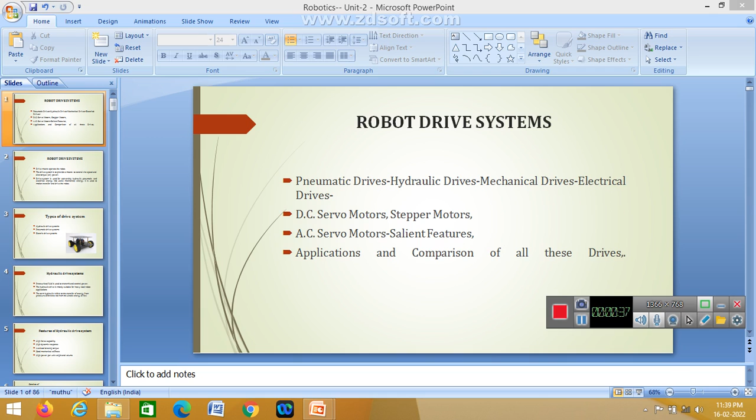Today we can see the topic of robot drive system. Okay, so the robot drive system. The following topics are to be covered, which is basically the types of drive system for the robot: hydraulic, pneumatic, mechanical, and electrical drives, and also electrical drives. The DC servo motor, stepper motor, AC servo motor, their salient features, then applications and comparisons of all these drives. Okay, so these are the topics to be covered for the robot drive system by using the robot applications.

Next one, robot drive system, its introduction and definition. Drive means operate the robot. Drive means which is used to operate the robot by using some elements or machines, so we can carry out the work. Okay, so that is the work of drive system. It is used to provide a means to control the speed and torque, also used to drive the system. Okay, so that is the second point.

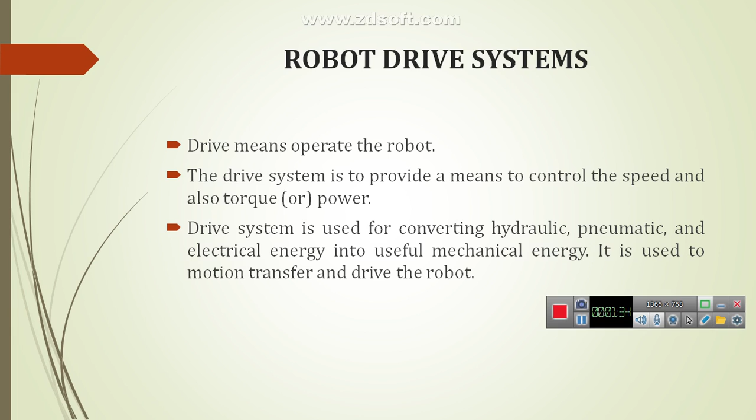The third one is the drive system is used for converting the hydraulic, pneumatic, and electrical energy into useful mechanical energy. Okay, so it is converted into a useful form of mechanical energy. So it is used for motion transfer and to drive the robot. Okay, so this is the drive system; we can carry out the work from the robot. So the types of drive system, basically three: hydraulic drive system, pneumatic drive system, electrical drive system.

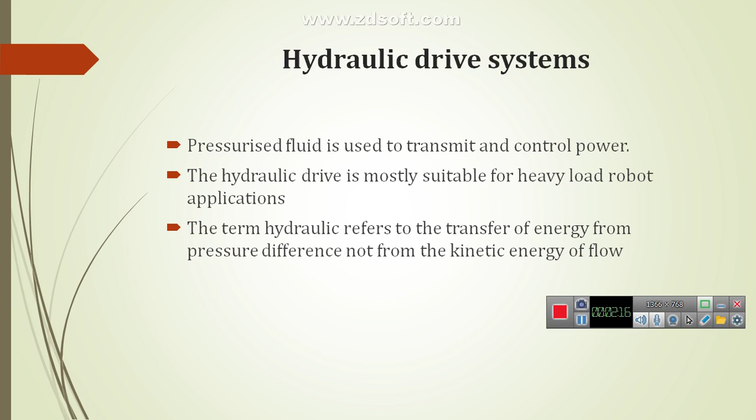So the hydraulic drive system uses pressurized fluid to transmit and control the power. Okay, so we can use the pressurized fluid to control the power of the robot. Then hydraulic drive is suitable for heavy load robot applications. Only for heavy load robot applications we can use the hydraulic drive system. The third one, hydraulic refers to the transfer of energy from the pressure difference, not from the kinetic energy of flow. Okay, so this is the hydraulic drive system. For these concepts I will show the diagram.

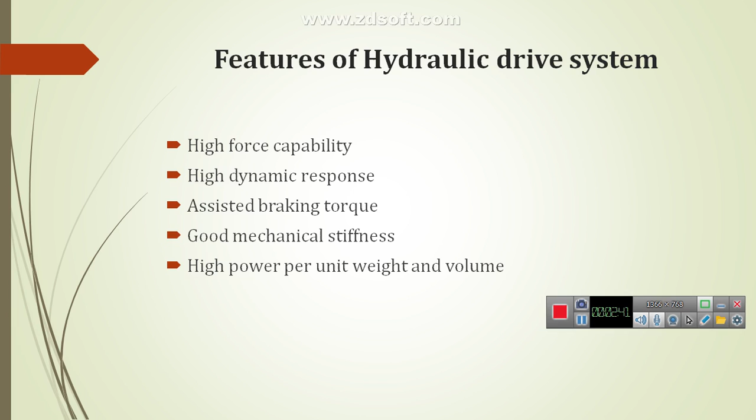The features of hydraulic drive systems: high force capability, high dynamic response, then assisted braking torque, then good mechanical stiffness, then high power per unit weight and volume. Okay, so these are the features of hydraulic drive systems. So the hydraulic drive consists of the following three main components. First one is actuator, control valve, and power supply. Okay, so these are the three main parts of the hydraulic system.

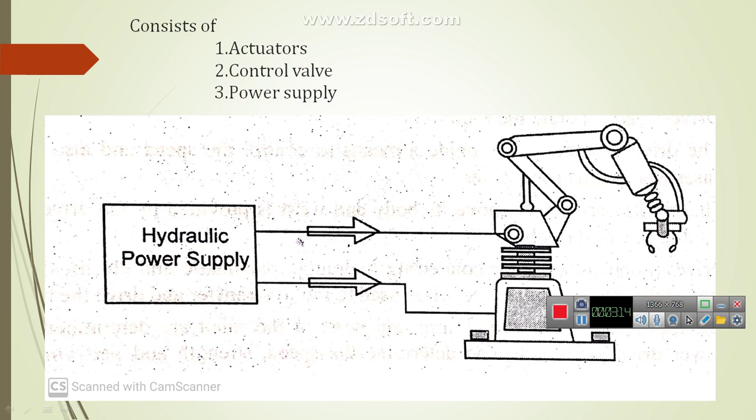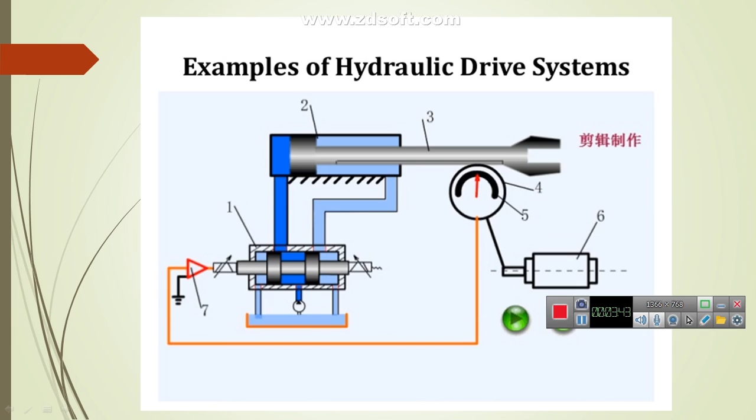So hydraulic power supplies carry the power supply to the actuator, control valves control the process, and finally the work is carried out by the end effector. Okay, so that is the work done by the robot using hydraulic drive. Then the diagrams here show the robotic actuators, which are connected to some solenoid valves, and also connected to some valves arranged by the hydraulic drive system. Okay, so that is easy to operate by using the hydraulic drive system.

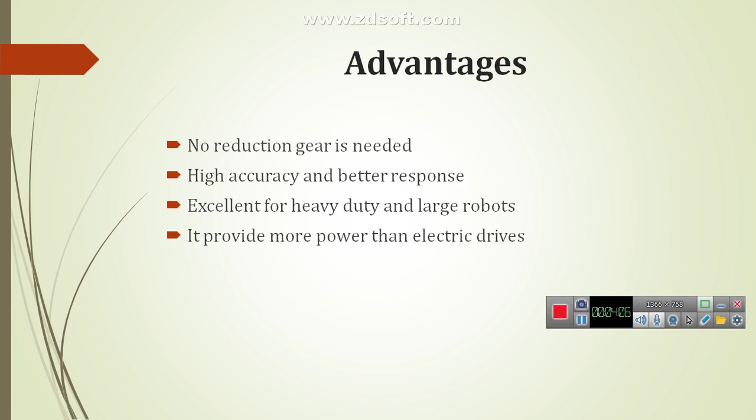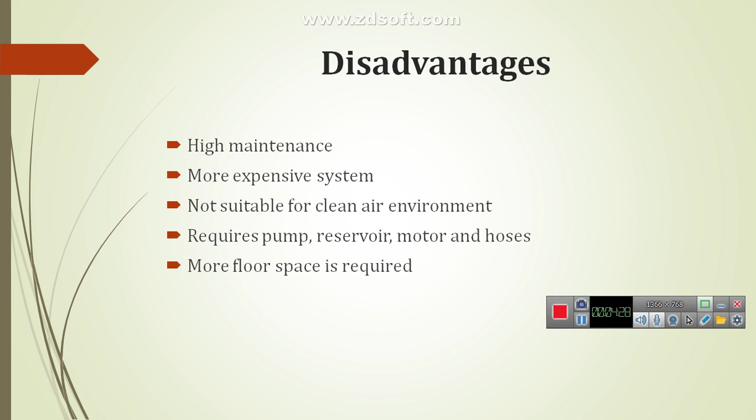Then this is the advantages of hydraulic system. No reduction gear is needed, high accuracy and better response, then excellent for heavy duty and large robots. It provides more power than electrical drives. Then disadvantages: high maintenance, more expensive system, not suitable for clean air environment, requires pumps, reservoir, motor and hoses. Then more floor space is required. So these are the disadvantages of using the hydraulic drive system.

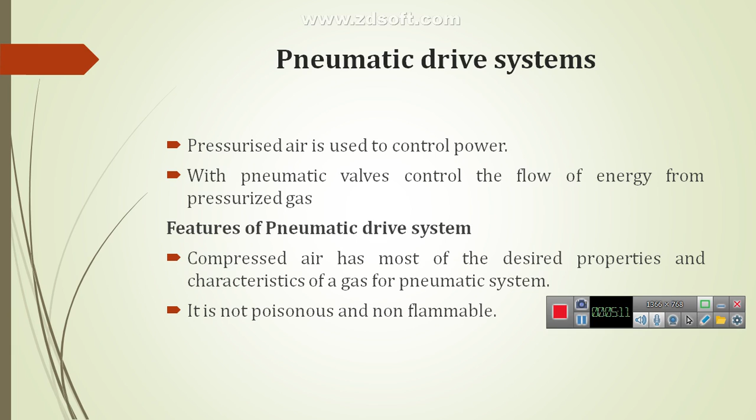Then second one is pneumatic drive system. Okay, so here pressurized air is used to control the power. In the previous one we used pressurized fluid. Here pressurized air is used to control the power. So that is the difference between pneumatic and hydraulic drive system. Then the pneumatic valve controls the flow of energy from pressurized gas. So the features of pneumatic drives: air has most of the desired properties and characteristics of gas for a pneumatic system. It is not poisonous and non-flammable, right?

Then it consists of the following three parts, connected by the power supply at the starting of the pneumatic system. The valves are connected to the actuator. Control valves control the arms and wrists. Okay, so finally they carry the work to the wrist.

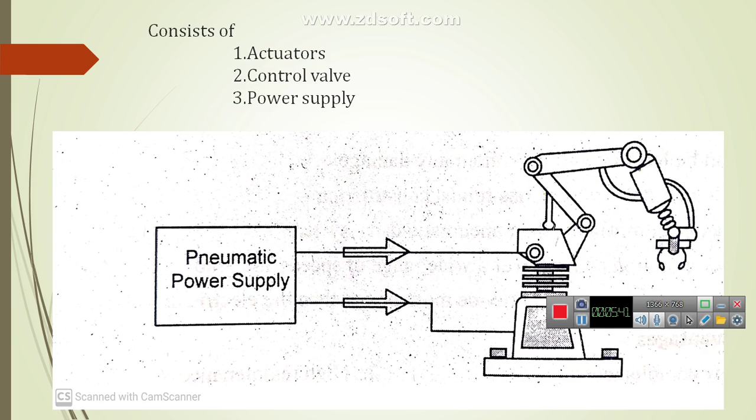Okay, next the components of pneumatic drive systems. Intake filter and compressor, cooler, separator, receiver, and finally the actuators to actuate the component. Intake filters initially remove the sediment parts. Compressors compress the air. Coolers are used to reduce the heat of the air, and the separator separates the air depending upon the work. And the receiver is a small storage device which is used to store the air from the reservoir.

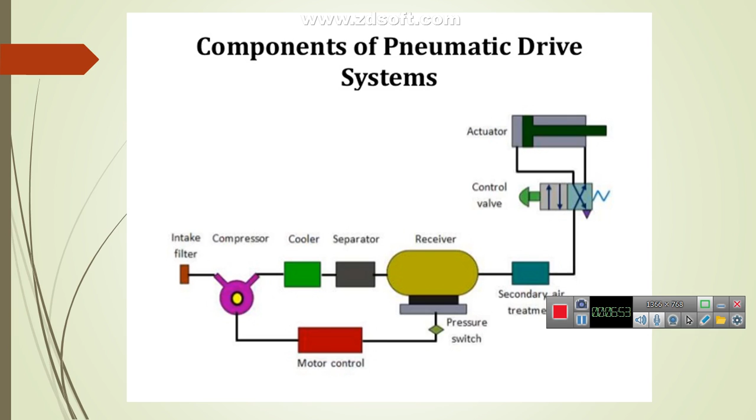Okay, so finally the secondary air treatment is connected, and the control valves are connected in between from the secondary air treatment, so that control valves are actuated by the actuator, and the actuator finally moves backwards and forwards in the pneumatic drive system. Okay, so these are the components of pneumatic drive system. This is the same diagram shown clearly. So this is the actuation using the pneumatic system in a packaging process. It is clearly shown in the diagram, and also it is a playable video to easily understand packaging using a pneumatic system.

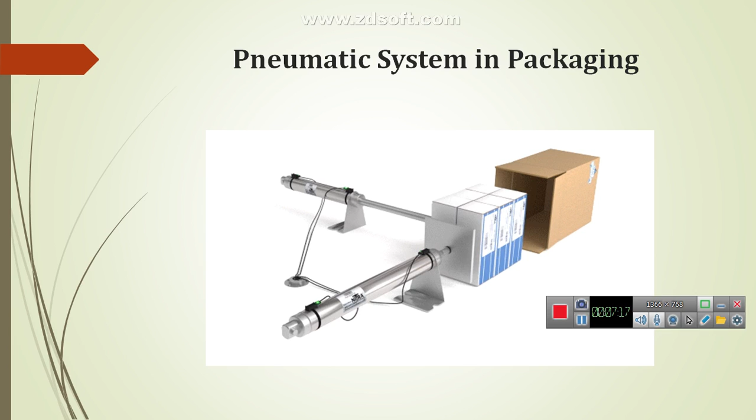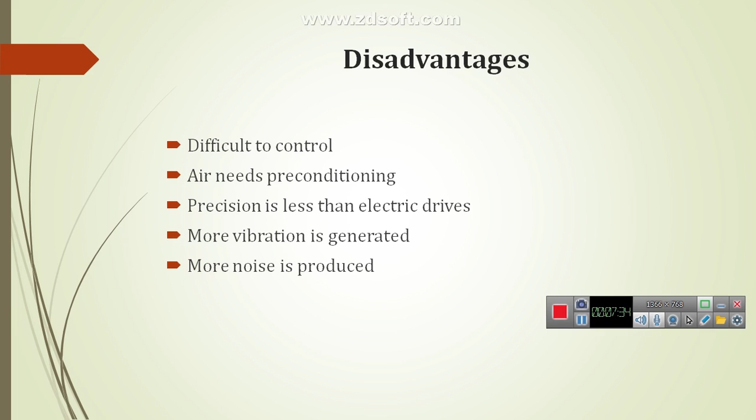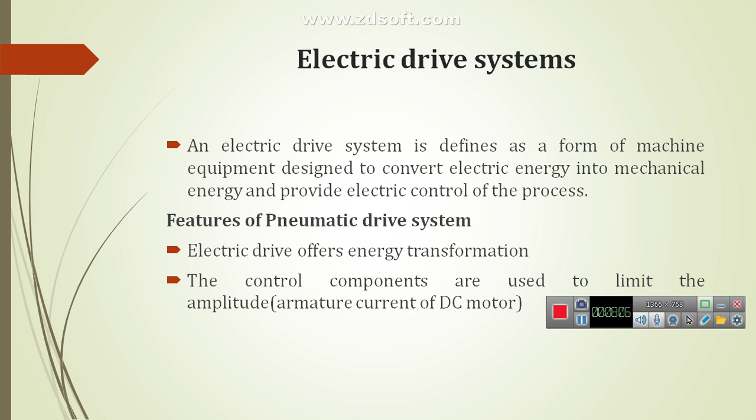Then the electrical drive system. An electrical drive system is defined as the form of machine equipment designed to convert electrical energy into mechanical energy and provide electrical control of the processes. The features: the electrical drive offers energy transformation, and the control components are used to limit the amplitude of the armature current to the DC motor. Okay, right.

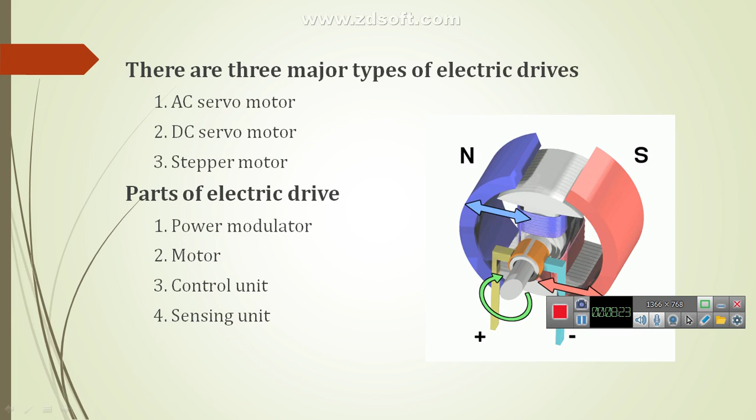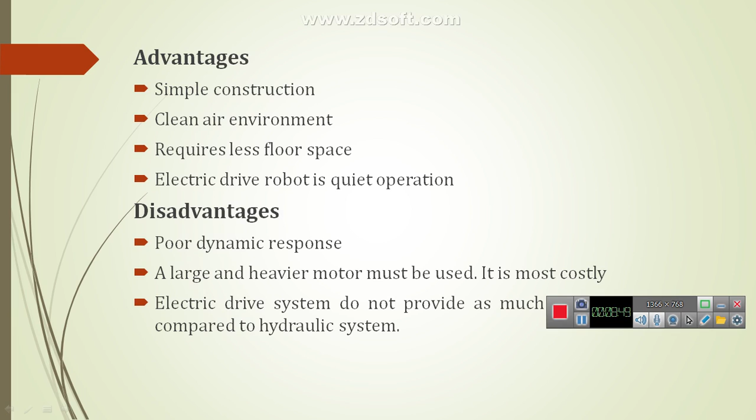Disadvantages: poor dynamic response. A larger and heavier motor must be used. It is also very costly. Right? So actuators are the devices used for converting hydraulic, pneumatic and electrical energies into mechanical energy. The mechanical energy is used to get the work done.

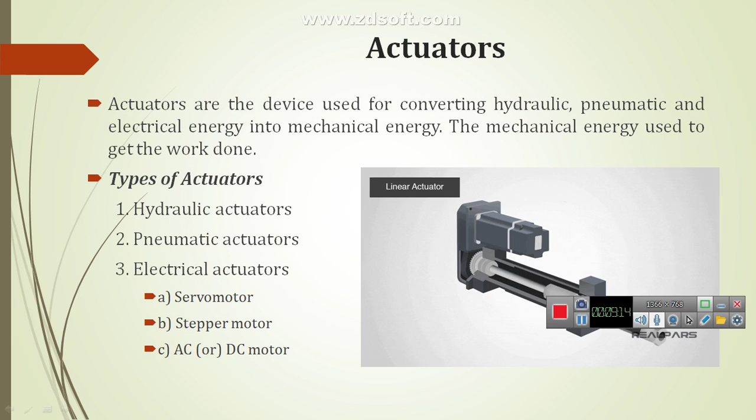The types of actuator: hydraulic actuator, pneumatic actuator, electrical actuator. The electrical actuators basically have three types: servo motor, stepper motor, and AC or DC motor. The diagrams are clearly shown here. The punching press operation is easily done by this process.

Okay, oil reservoir and oil filter, then hand shut-off valve, four-way valve, and finally the double acting cylinder has to work. The oil reservoir stores the oil. The oil sediments are removed by using the oil filter. The hydraulic pump delivers the pressurized fluid. We can indicate the pressure by the pressure indicator. The hand shut-off valve is used to hold the pressure.

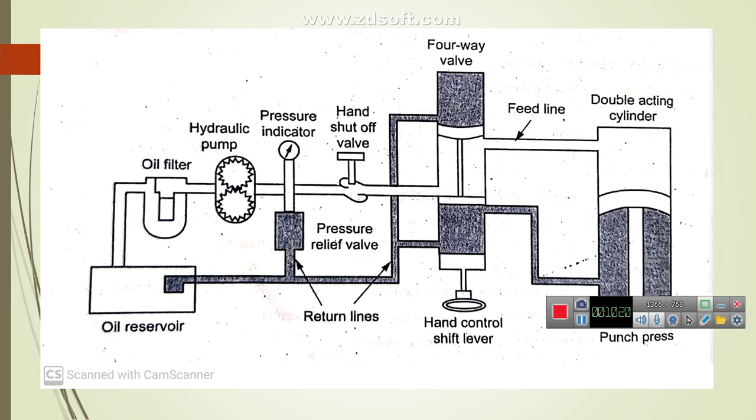Okay, so the four-way valve controls the direction of motion. Then finally the valve operates the double acting cylinder. That is how the punch press works in this process.

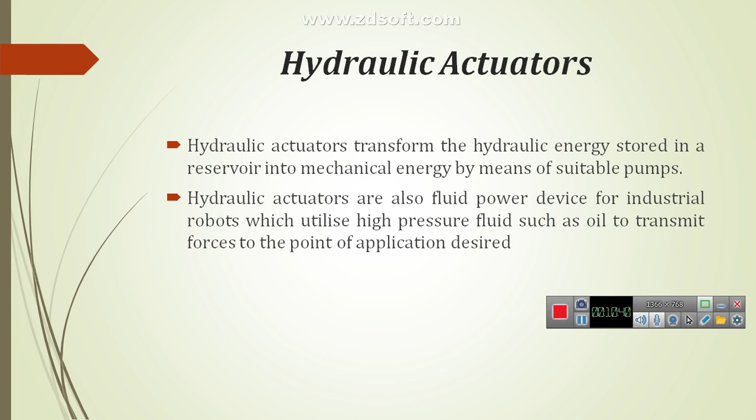A hydraulic actuator transforms the hydraulic energy stored in a reservoir into mechanical energy by means of suitable pumps. Hydraulic actuators are also fluid power drives for industrial robots which utilize high pressure fluid such as oil to transmit forces to the point of application desired. These are the characteristics of hydraulic actuating systems. The designer should know the operating cycle, operating pressure, types of pumps, maximum and minimum operating and ambient temperatures, and loads encountered by the various components.

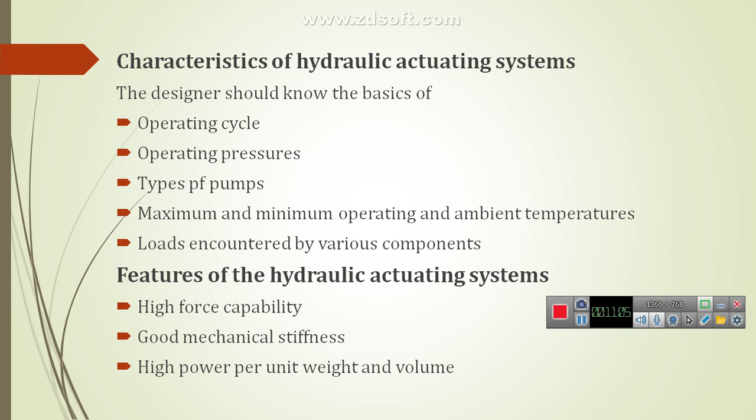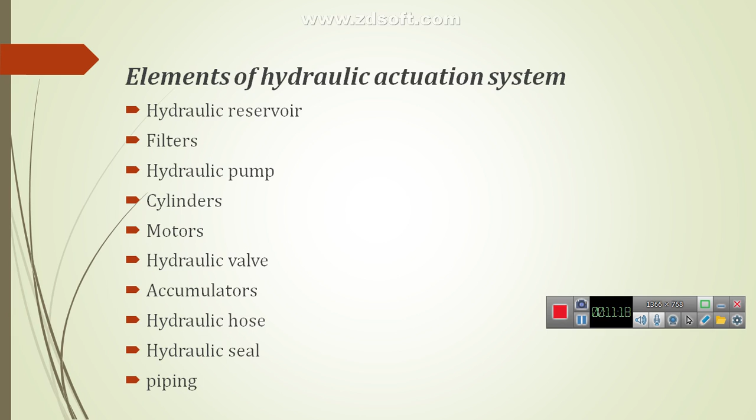The features of hydraulic actuator systems: high force capability, good mechanical stiffness, high power per unit weight and volume. The elements of a hydraulic actuation system: hydraulic reservoir, filter, hydraulic pump, cylinder, motor, hydraulic valve, accumulator, hydraulic hoses, hydraulic seals and piping. The types of hydraulic actuator: single acting spring return type, double acting spring return type, cylinder type, and ram type.

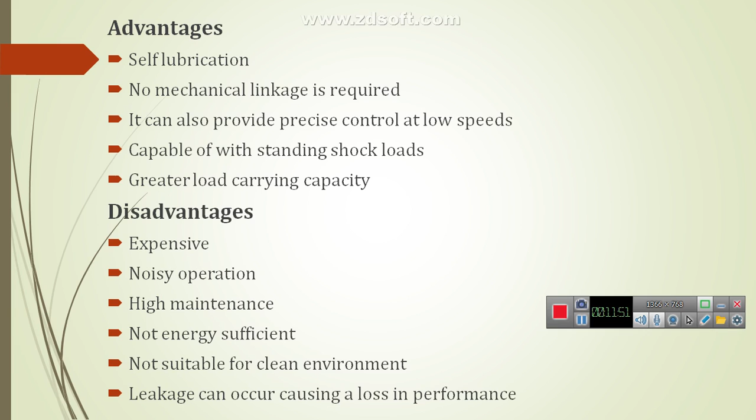Advantages: self lubrication, no mechanical linkages required. It can also provide precise control at low speed, is capable of withstanding shock loads, and has greater load carrying capacity. Disadvantages: expensive, noisy operation, high maintenance, not energy efficient, not suitable for clean environments, and leakage can occur causing a loss in performance.

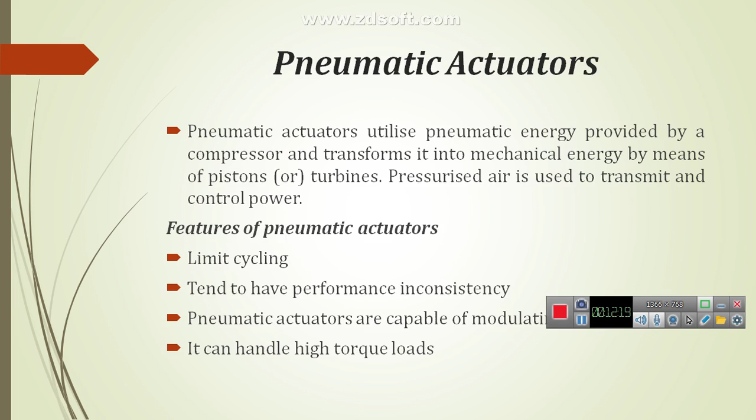Then the pneumatic actuator utilizes the pneumatic energy provided by the compressor and transforms it into mechanical energy by means of pistons or turbines. Features of pneumatic actuators: limit cycling, and they tend to have performance inconsistency. Pneumatic actuators are capable of modulating, and they can handle high torque loads. The common parts of a pneumatic system: compressor, check valves, regulators, gauges, accumulator, and feed lines.

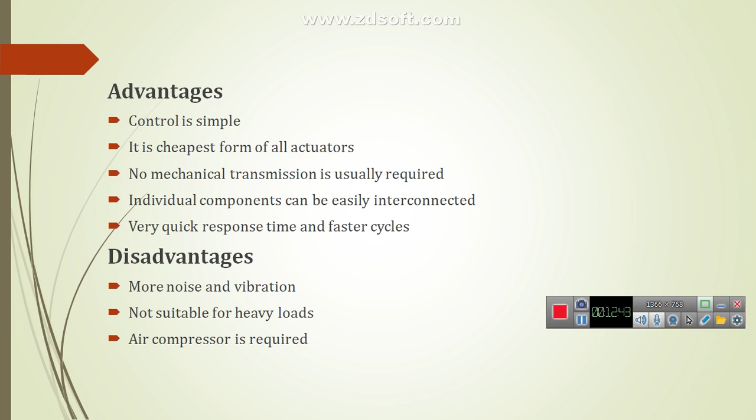Advantages: control is simple, it is the cheapest actuator, no mechanical transmission is usually required, individual components can be easily interconnected, very quick response time and faster cycle. Disadvantages: more noise and vibration, not suitable for heavy loads, air compressor is required.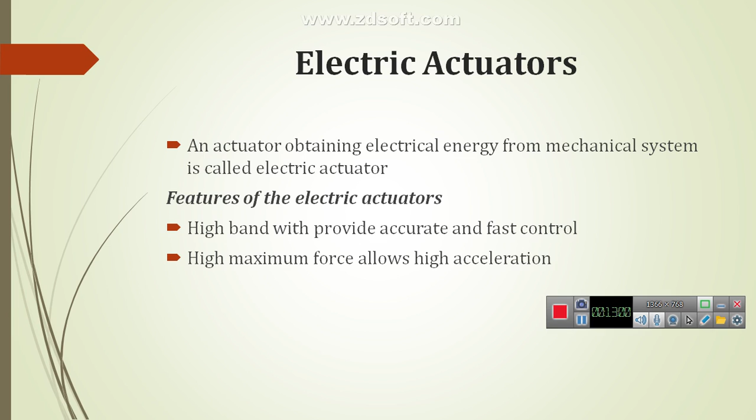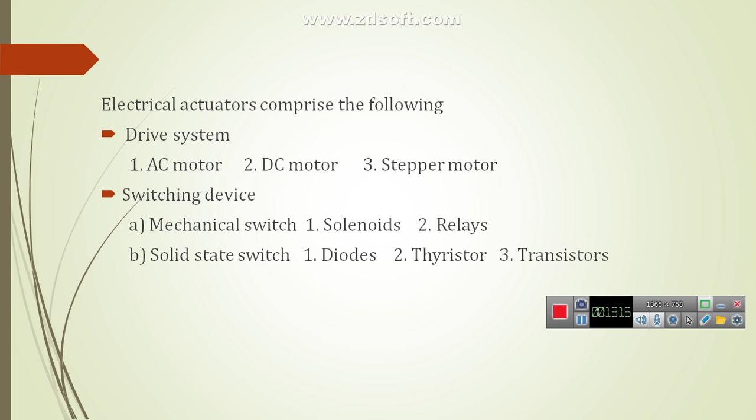An electrical actuator is an actuator obtaining electrical energy and converting it for the mechanical system. The features: high bandwidth, accurate and fast control, high maximum force, allows high accelerations. Electrical actuators comprise the following drive systems: AC motor, DC motor and stepper motors, and switching devices: mechanical switch, solenoid switch and relays, solid state switches, diodes, thyristors and transistors. These are the operations we can use with the electrical motor.

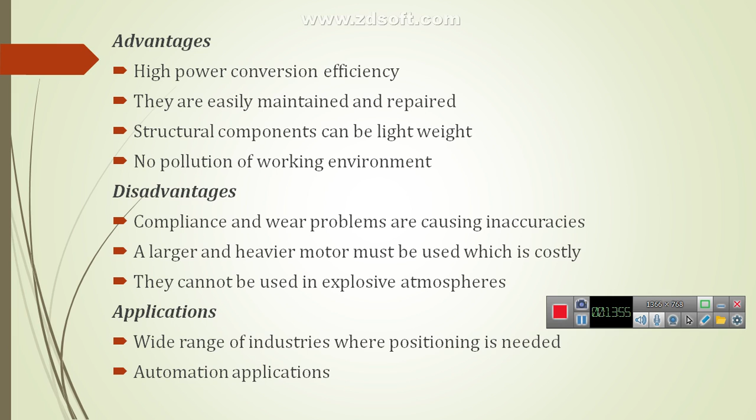Advantages: high power conversion efficiency, they are easily maintained and repaired as structural components and can be lightweight, no pollution of the working environment. Disadvantages: compliance and wear problems cause inaccuracies. A larger and heavier motor must be used, which is costly. They cannot be used in explosive atmosphere applications. They are used in automation applications and in a wide range of industries where positioning is needed.

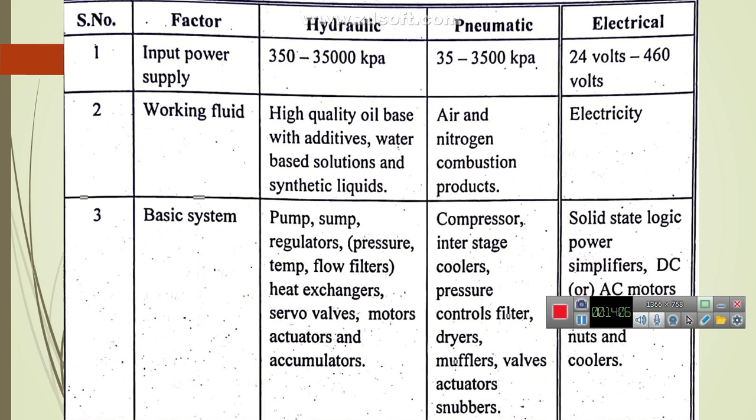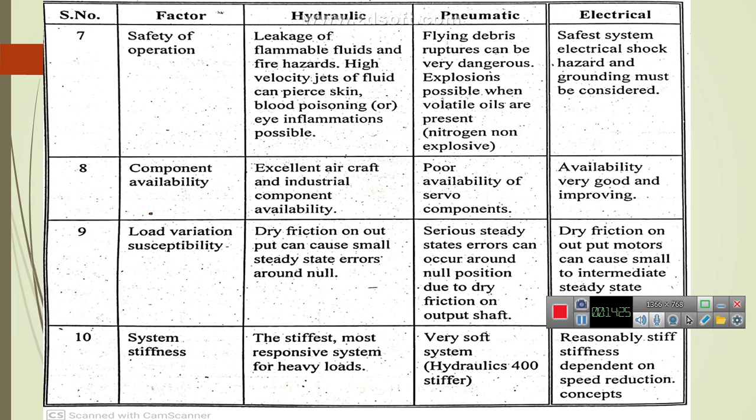So we can compare the factors for the three drive systems: hydraulic, pneumatic and electrical. It depends upon the factors: input power supply, working fluid and basic system, efficiency, weight to force ratio, susceptibility to contamination, safety of operation, component availability, load variation susceptibility, and system stiffness. Then the final topic is the various kinds of motors: stepper motor, servo motor, AC servo motor and DC servo motor.